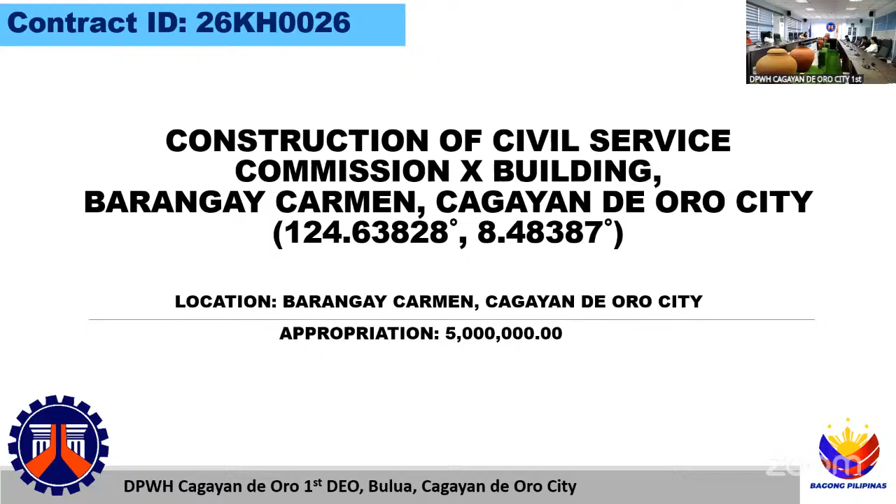Good afternoon. I will be presenting to you the first project entitled Construction of Civil Service Commission 10 Building, Barangay Carmen, Cagayan de Oro, located at Barangay Carmen, Cagayan de Oro, with an appropriation of 5 million. For the ABC, 4,899,645 and 47 cents, with a calendar days of 180. Major category: PCAB PLC buildings, construction without piles, low-rise concrete frame. Similar major category: PCAB PHC buildings, construction without piles, high-rise concrete frame.

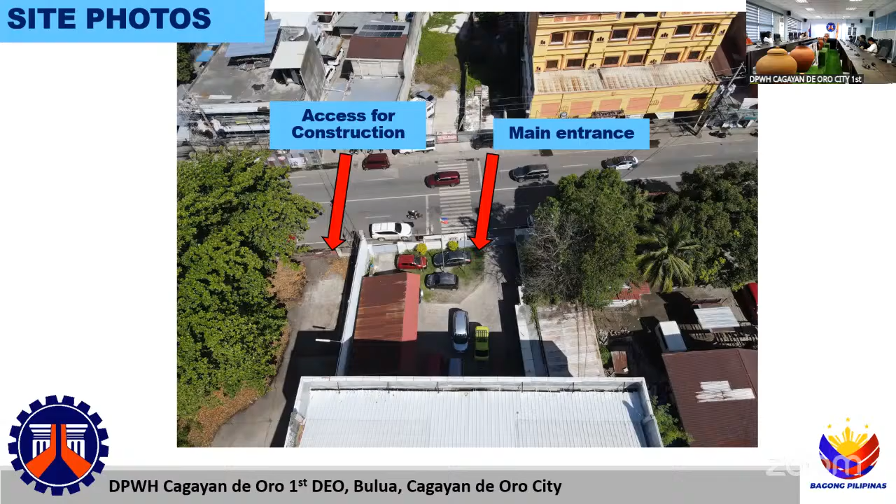The scope of work for this project is the construction of Civil Service Commission 10 building, CSC, as per plan. This is the site of the project, located at the Civil Service compound, showing the main entrance of the building and the proposed access for construction, which is the nearby property Bosco Sugar located at Carmen. Showing the main building of the Civil Service Commission.

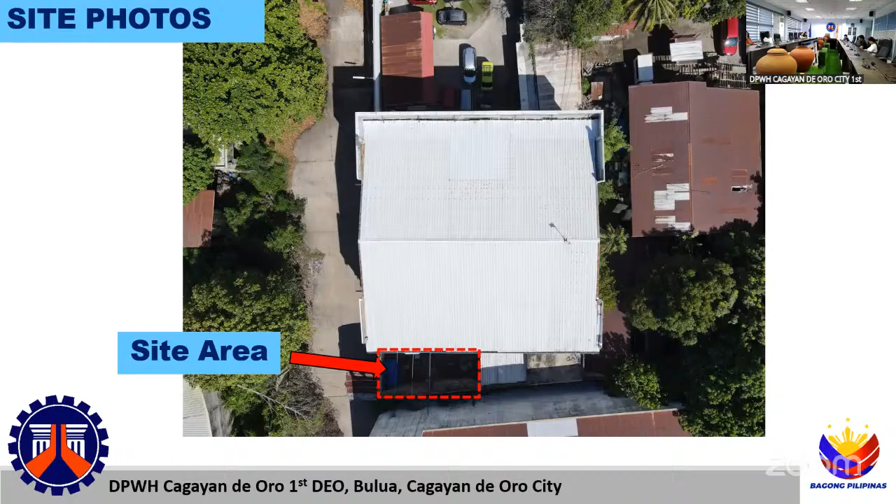This is the roof plan of the main building, and this is the proposed site area located at the rear portion of the building. This is the proposed perspective of the project, the two-story building.

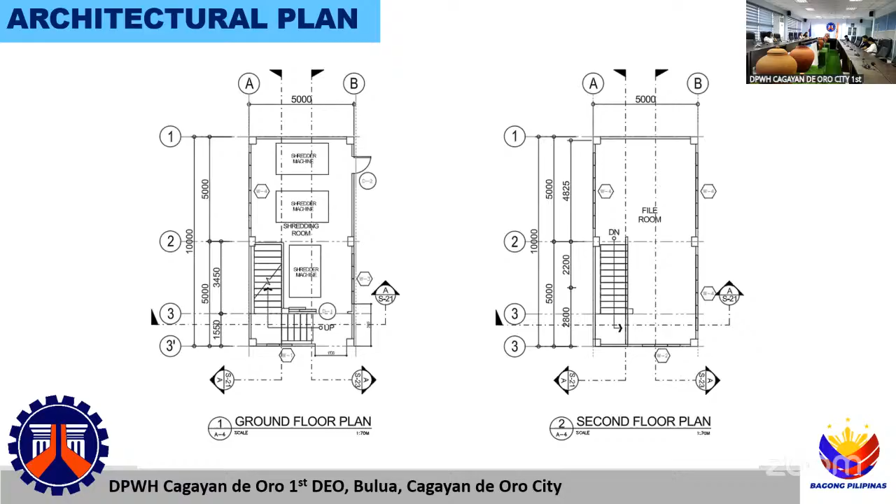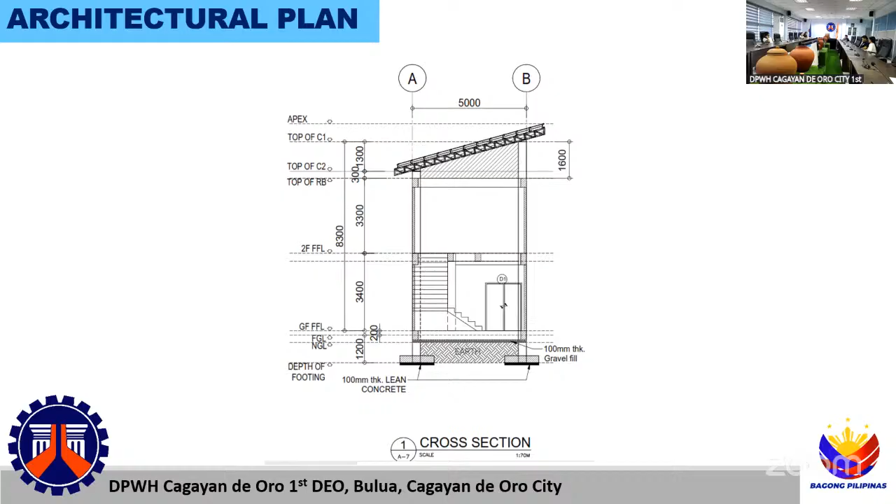Showing the cross section and our longitudinal section. So these are our schedule of doors and windows.

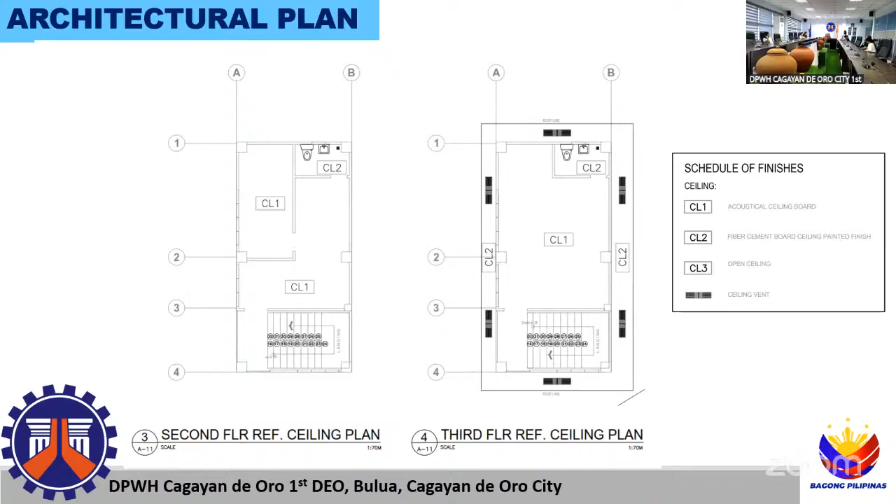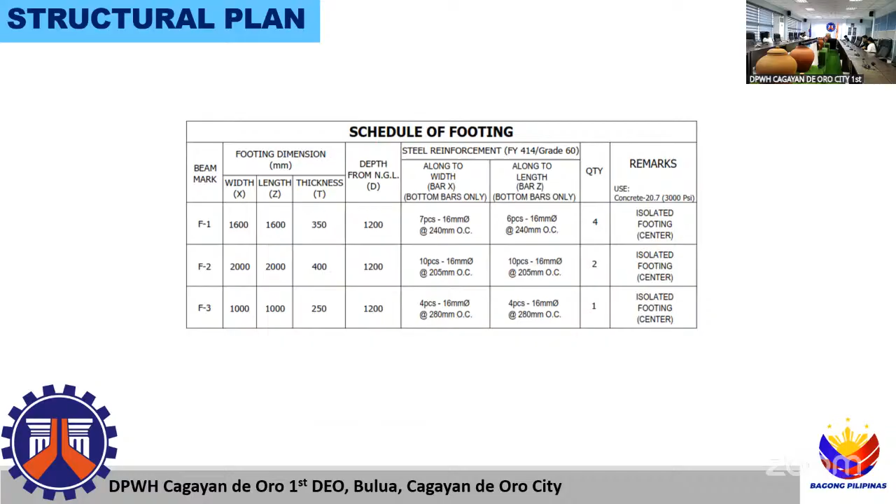For our footings and columns, for our scheduled footings, column details, our beam details.

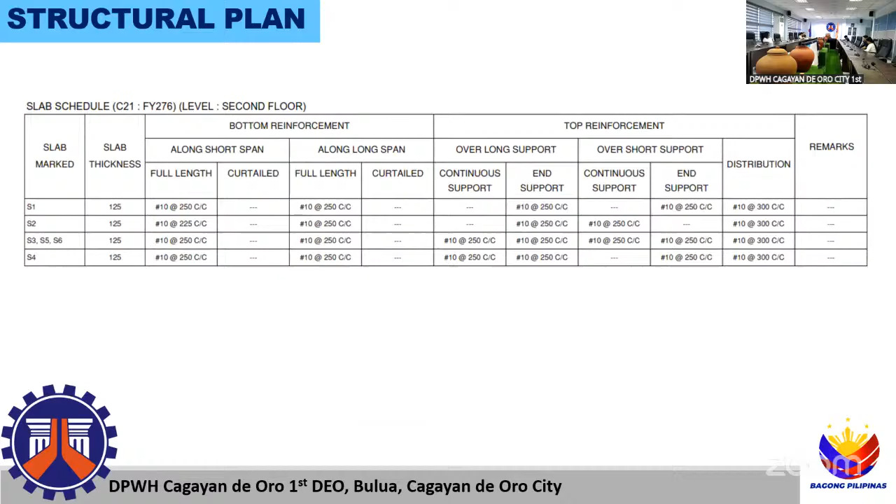Schedule of beams, for our slab detail, slab sections.

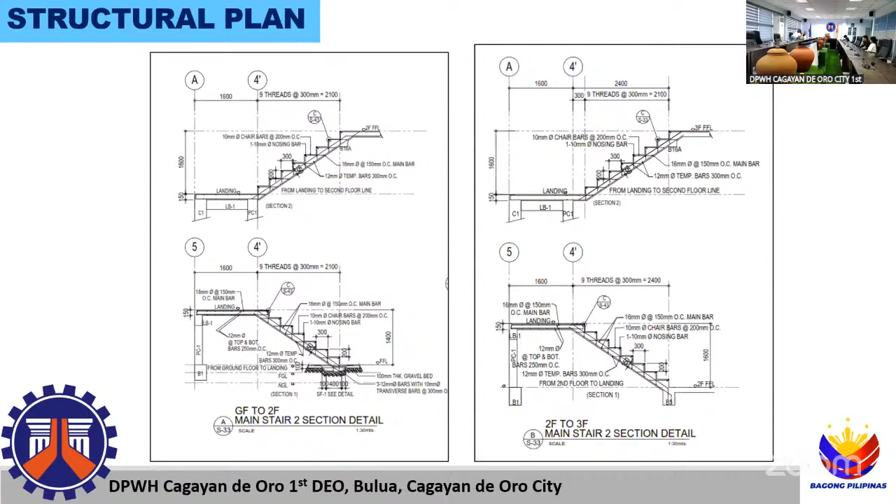Our longitudinal section and cross sections, for our framing and truss details, for the connection members, their details.

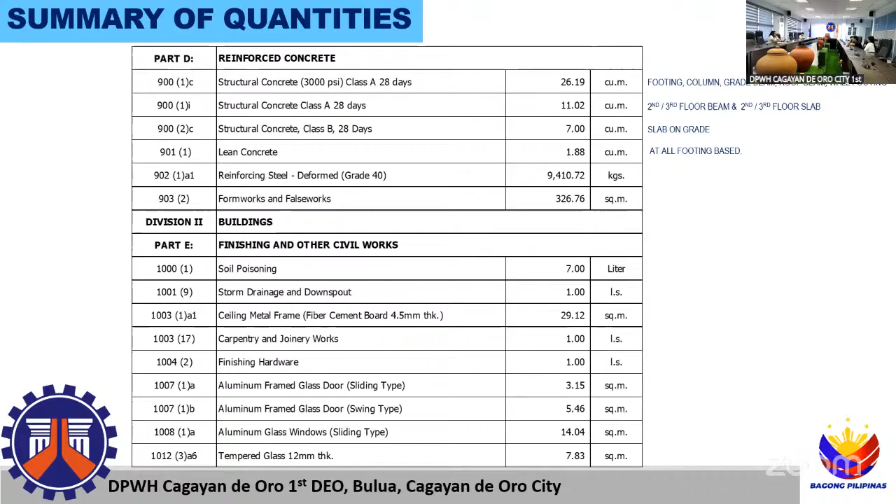Next, fabricated metal roofing accessory, gauge 26, for flashings, 46.36 linear meter, pre-painted metal sheets above 0.427 mm, rib type long span, 95.70 square meters, and glaze tile, 83.10 square meters.

Cement plaster finish, 443.56 square meters. Acoustical ceiling panel, 96.04 square meters.

Painting works, masonry and concrete, 337 square meters. Painting works for wood, 29.31 square meters. Painting works for steel, 8.32 square meters. Reflective insulation, 76.56 square meters.

CHB non-load bearing, including reinforcing steel, 100 mm, 132.28 square meters. Metal structure accessories, bolts and rods, 24 each. Metal structure accessories, turnbuckle, 16 each. Metal structure accessories, sag rods, 12.43 kilograms.

Metal structure accessories, cross bracing, 82.06 kilograms. Metal structure accessories for steel plates, 191.48 kilograms. Structural steel, 1 lump sum.

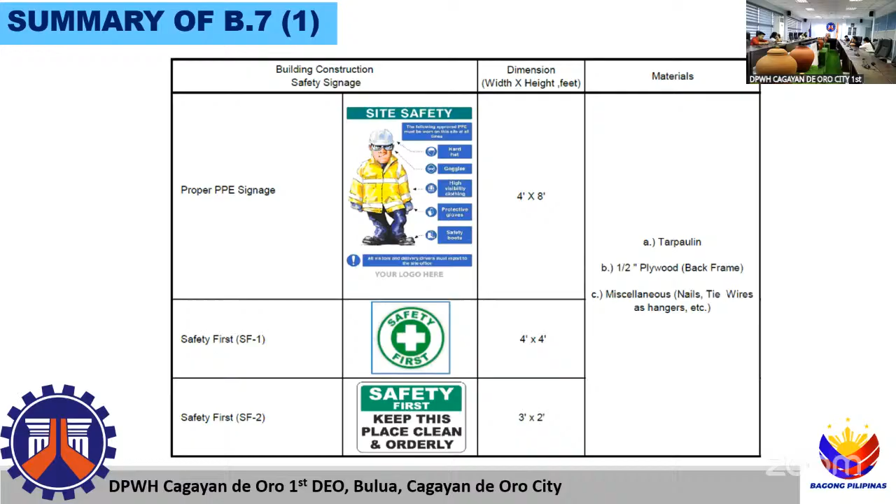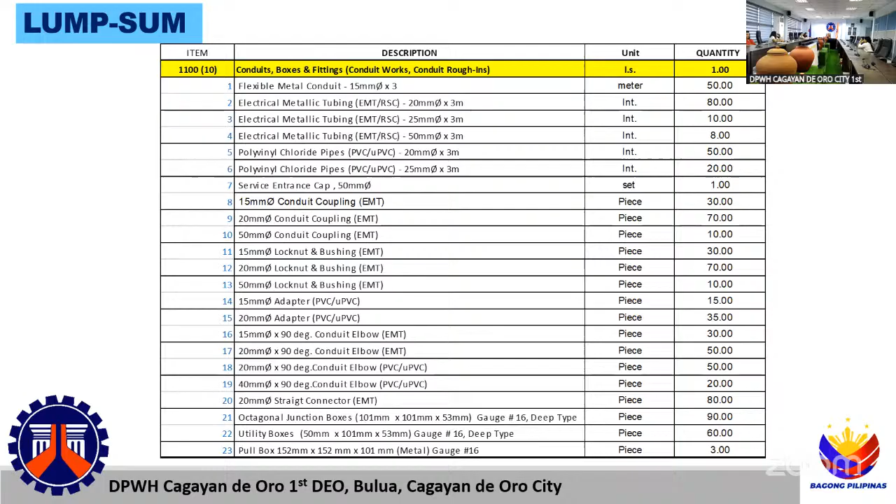So for the item, for the conduits, boxes and fittings, we have these items here, all the wirings, for conduits, boxes and fittings, and then for wires and wiring devices.

For panel boards, we have main distribution panel with 200 amperes, 250 amperes, single phase, 2P, 230 volts, 60 hertz, NEMA 1 flush mounted with 12 branch circuit breakers. Enclosure, 20 ampere 4 sets, 30 ampere 6 sets. This is 1 set. And then 250 AF main circuit breaker, single phase, 230 volts, 60 hertz in a NEMA 3R enclosure.

1 set also. For lighting fixtures and lamps, we have 30-watt ceiling mounted LED panel light, 6,500K, 3,030 LM, 1,200mm by W by 300mm, 230 volts, 60 hertz.

For 15 sets. For 5-watt self-contained emergency light pack, non-maintained 8 hours duration with 2 LED lamp, 230 volts, 60 hertz for 3 sets. Then 9-watt downlighting light fixtures with 12 watts LED bulb, 6 inches diameter recessed type for 8 sets.

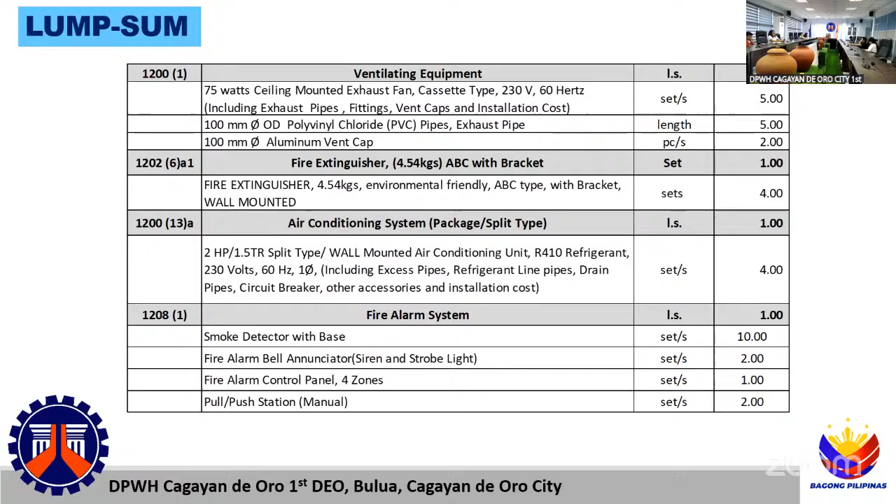For our CCTV system inclusion: CCTV camera dome type, 6 sets. CCTV camera PTZ type, 1 set. CCTV console, 1 set. Digital video recorder, 1 set. 1.5 kVA power supply, 1 set. 22-inch LCD LED monitor, 1 unit. And RG59 coaxial cable.

So for our minimum equipment requirement: backhoe, 1 unit lease; concrete vibrator, 2 units owned; dump truck, all models, 1 unit lease; bagger mixer, 1 unit owned; plate compactor, 1 unit owned; grinding machine with accessories, 1 unit owned; bar cutter, 1 unit owned; bar bender, 1 unit owned; welding machine, 1 unit owned; boom truck.

1 unit lease, material testing apparatus 1 set owned, minor tools 1 set owned, jackhammer 1 unit owned, concrete pump diesel driven 1 unit owned.

So, any questions from our viewers?

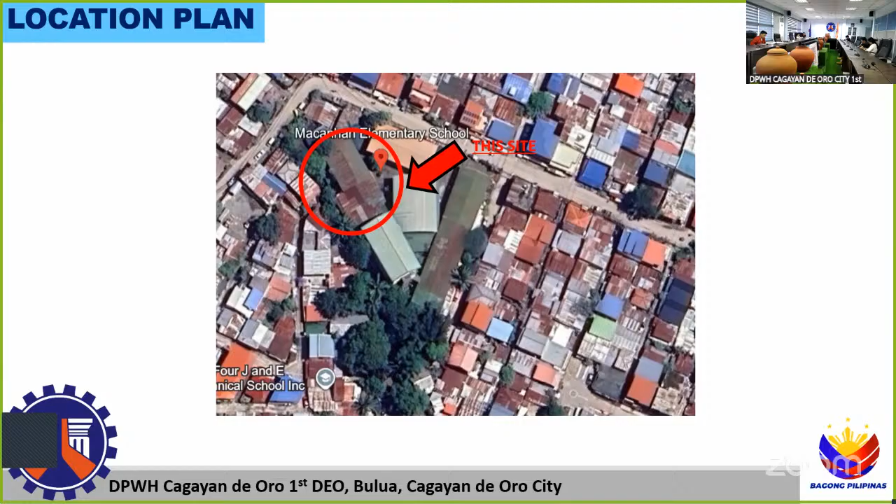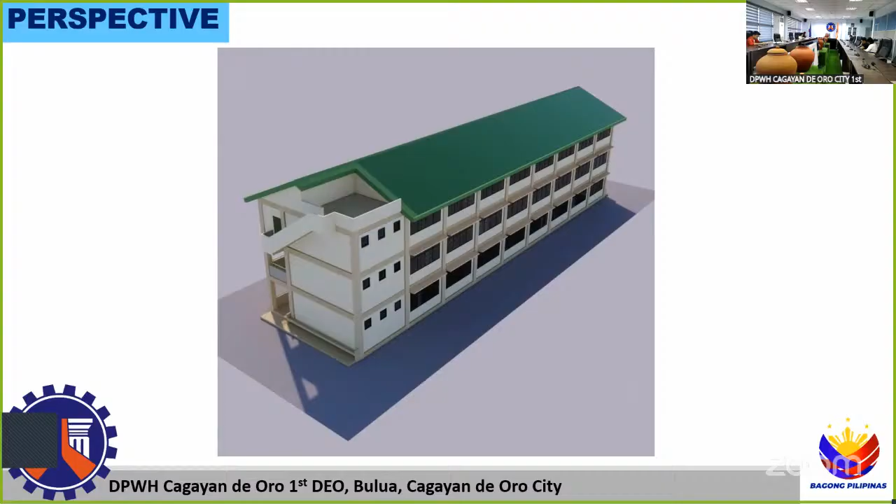This is the ground floor plan for the building. The first classroom will be assigned as a feeding room, with classrooms 3 and 4 combined as a library. For the second floor, 2 classrooms will be combined as an ICT room. And on the third floor, 2 classrooms will be combined as the science room.

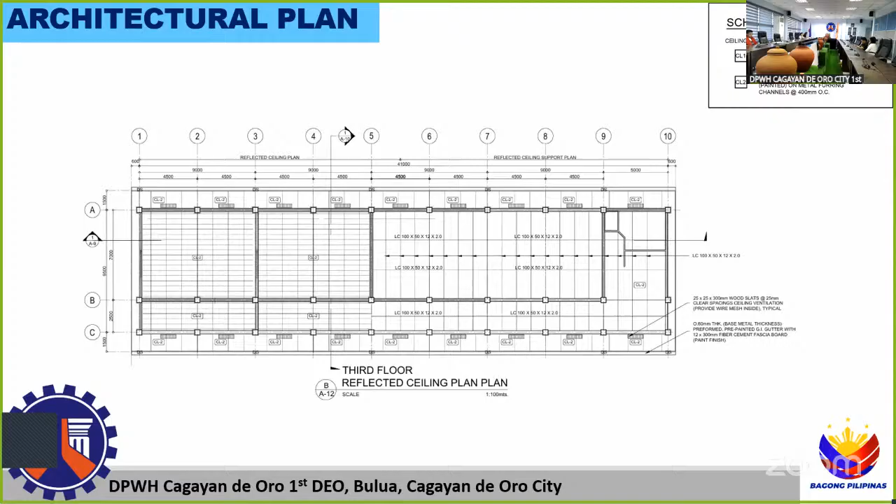Front elevation of the building, rear elevation, left and right side elevation, longitudinal section, cross section, ground floor reflected ceiling plan, second floor reflected ceiling plan, third floor reflected ceiling plan, the roof plan, schedule of doors and windows, detailed section of toilet for strict compliance as per BP 344, detailed elevation, detailed plan, and blow up details of handrails.

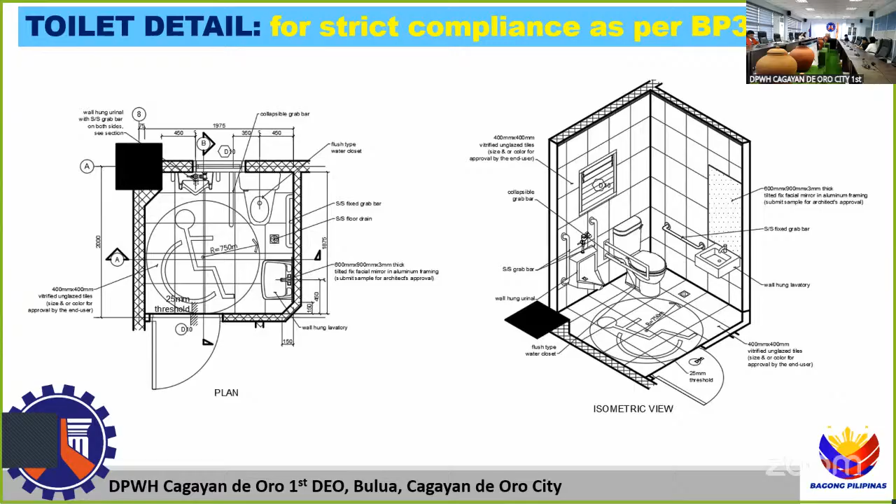Toilet detail. These are the details for the PWD toilet for strict compliance as per BP 344. Details of the ground floor.

Details for the male toilet at second and third floor and female toilet at the ground floor. Section 1 and 2 detail for male toilet, and section 1 and 2 details for female toilet.

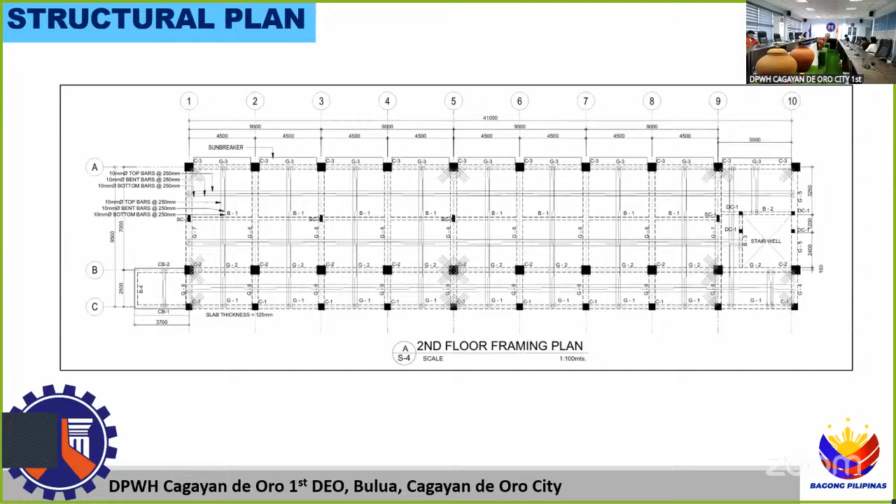These are the foundation plan, ground floor framing plan, second floor framing plan, third floor framing plan, roof framing plan at bottom chord level, and roof framing plan.

Detailed plans of combined footing and footings, footing tie beams and stub columns. Schedule of footings and footing tie beams. Elevation of column and columns, schedule of columns. Schedule of beams, schedule of secondary beams.

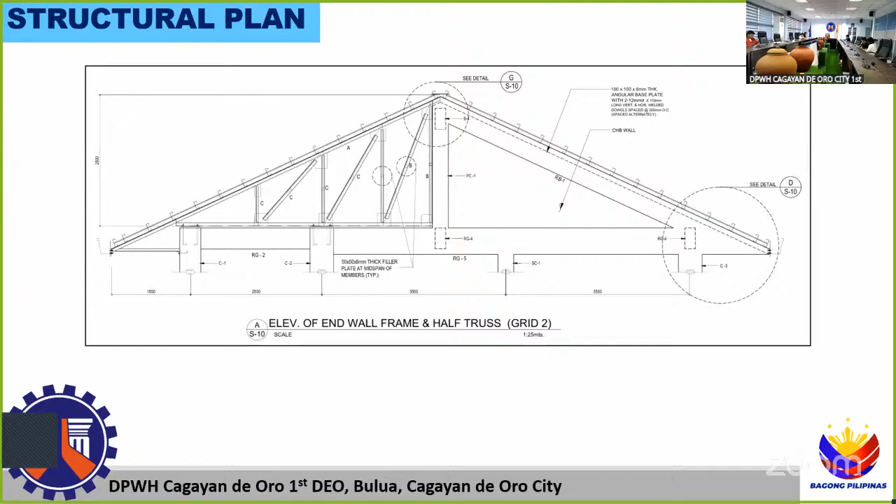Truss 1 elevation, elevation of end wall frame and half truss at grid 2. Schedule of truss members and welds. Concrete sunbreaker detail, and the stairs section detail. Blow up details for the stairs.

And the detail of the septic vault. Detail of the cistern tank. Longitudinal section of the cistern tank.

The ground floor plan, soil and wastewater line layout. Second floor, soil and wastewater line layout. Third floor plan, soil and wastewater line layout. And the roof drain layout.

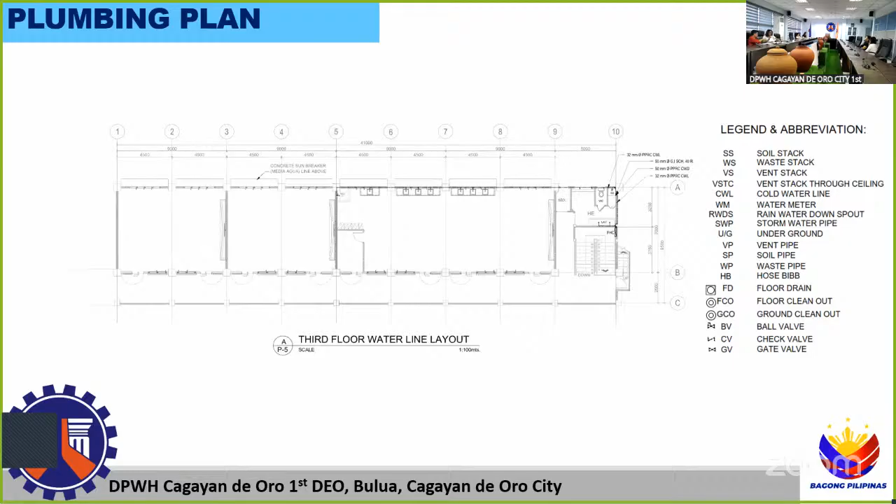Ground floor water line layout. Second floor water line layout. Third floor water line layout and the roof deck water line layout.

Summary of quantities. Facilities for the engineer. Construction of field office for the engineer, 1 lump sum. Permits and clearances, 1 lump sum. Project billboard and signboard, 2 each. Occupational safety and health program, 1 lump sum. Mobilization and demobilization, 1 lump sum.

For the earthworks: removal of structure and obstruction, 1 lump sum. Structure excavation, common soil, 1,338.53 cubic meters. Individual removal of trees, 1 each. Embankment from roadway structure excavation, common soil, 1,703.43 cubic meters. Embankment from borrow, common soil, 364.9 cubic meters. Gravel fill, 123.81 cubic meters.

For the reinforced concrete: structural concrete, 3,000 PSI, class A, 28 days, 525.09 cubic meters. Structural concrete class B, 28 days, 81.99 cubic meters. Reinforcing steel, D4, grade 40, 118,250.40 kilograms. Formworks and false works, 2,966.83 square meters. For the finishing and other civil works: soil poisoning, 34 liters.

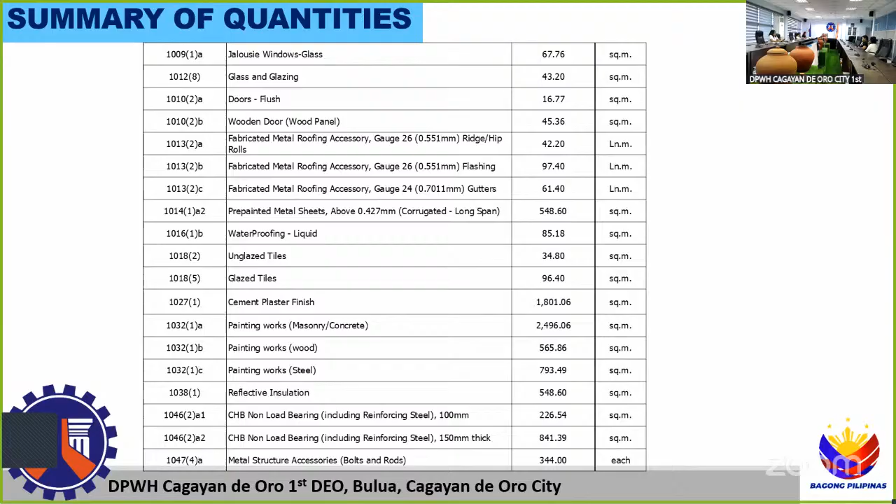Metal structure accessories: bolts and rods, 344 each. Turnbuckle, 36 each. Sag rods, 245.09 kilograms. Cross bracing, 397.66 kilograms. Steel plates, 1,476.63 kilograms. Structural steel, 1 lump sum.

Structural steel trusses, 3,864.64 kilograms. Structural steel purlins, 3,864 kilograms. Welding, 1 lump sum.

For electrical: conduits, boxes and fittings, 1 lump sum. Wires and wiring devices, 1 lump sum. Panel board with main and branch breakers, 1 lump sum. Pole mounted transformer with complete accessories, single or three-phase, pole type or platform, 1 lump sum. Generator, single or three-phase, 1 lump sum. Lighting fixtures, 1 lump sum. CCTV system, 1 lump sum.

For the mechanical ventilating equipment, 1 lump sum. Air conditioning system, 1 lump sum. Water pumping system, 1 lump sum. Automatic fire sprinkler system, 1 lump sum. Fire hose cabinet assembly, 3 sets. Fire extinguisher, 4.54 kilograms with bracket, 12 sets. Fire department connections for wet and dry type system, 1 set. And fire alarm system, 1 lump sum.

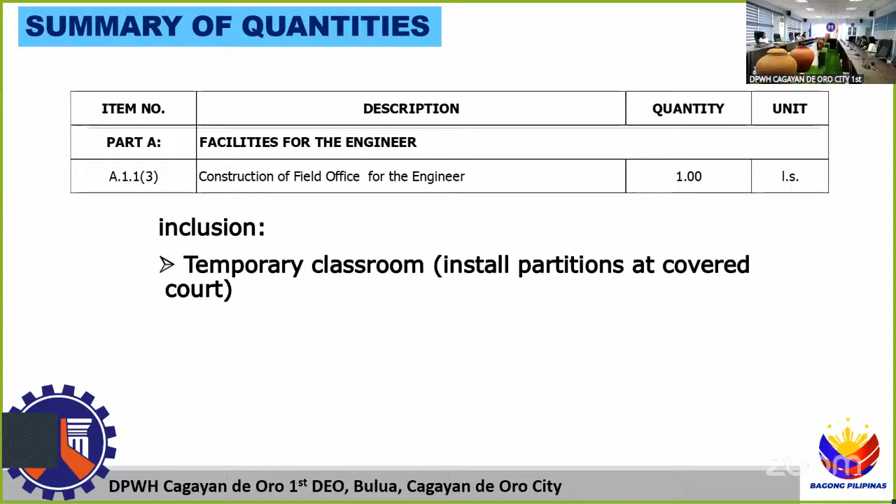For the summary of lump sum: facilities for the engineer, inclusion, temporary classroom, installed partitions at covered court. Permits and clearances, inclusion: building permit, all professionals, and the Bureau of Fire.

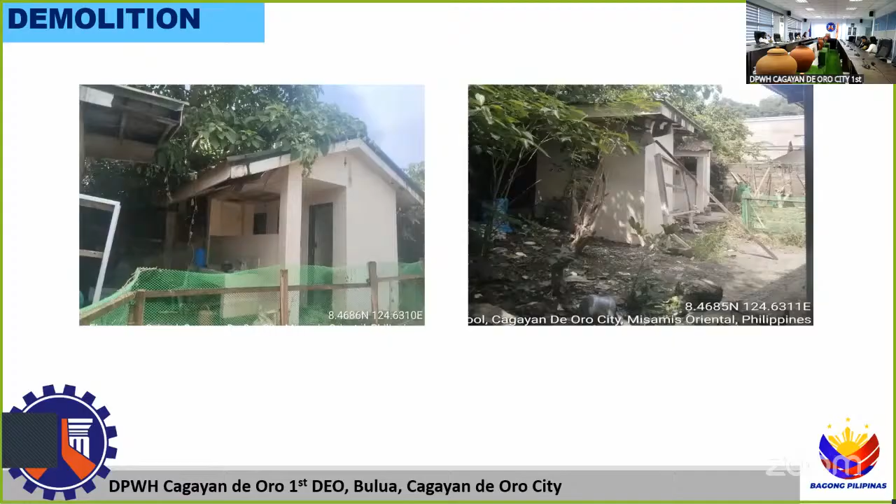For the removal of structures, inclusion is the demolition of the existing structure and the adjacent structure, the HE building, and the existing 1 classroom at the left side of the 2-story existing building, and the existing toilets at the rear side of the building.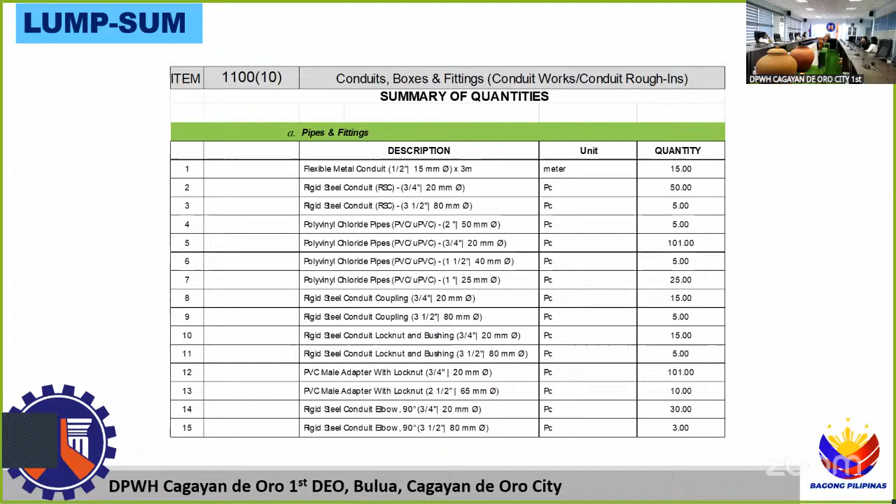For the carpentry and joinery works. For the conduits, boxes and fittings. For the wires and wiring devices. For the panel board with main and branch breakers. For the pole mounted transformer with complete accessories. For the lighting fixtures and the CCTV system.

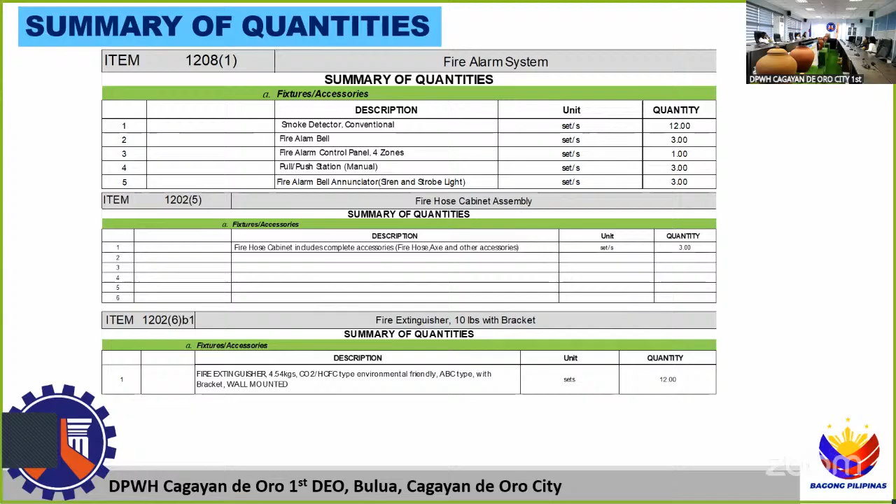For the ventilating equipment, for the air conditioning system: 4 HP wall mounted air conditioning unit, 6 sets. Water pumping system. Fire alarm system, fire hose cabinet assembly, fire extinguisher, 12 sets.

Minimum equipment requirement: backhoe, 1 unit, leased. Concrete vibrator, 2 units, owned. Dump truck, all models, 1 unit, owned. 1 bagger mixer, 1 unit, owned. Plate compactor, 1 unit, owned. Grinding machine, 1 unit, owned. Bar cutter, 1 unit, owned. Bar bender, 1 unit, owned. Welding machine, 1 unit, owned. Truck mounted crane, standard lattice boom, all models, 1 unit, leased. Pumpcrete, 1 unit, leased. Material testing apparatus as per DEO 11 series of 2017, 1 unit, owned. Minor tools, 1 unit.

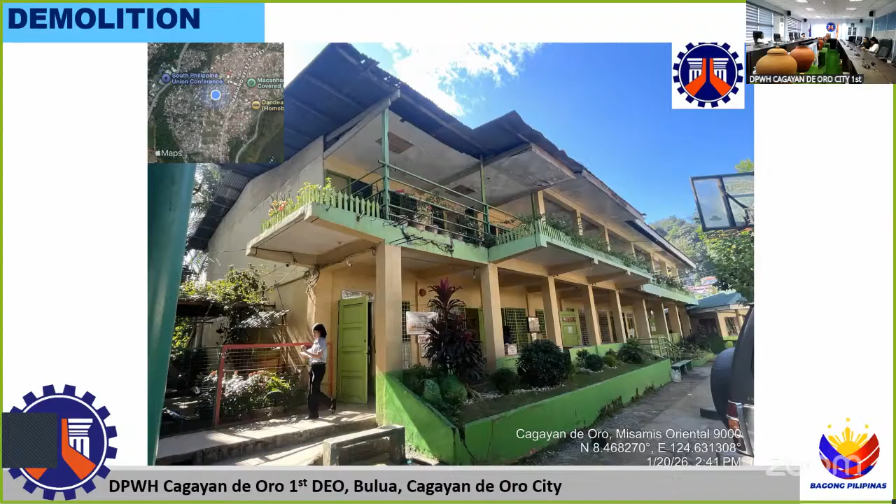26KH0048, network development off-carriageway improvement, primary roads, Butuan City, Cagayan de Oro City, Butuan City, Cagayan de Oro City, Iligan City Road, S01247, kilometer 1441 plus minus 842 to kilometer 1439 plus 184, Cagayan de Oro City. The details of this project will be discussed by Engineer Aldrin Farfel.

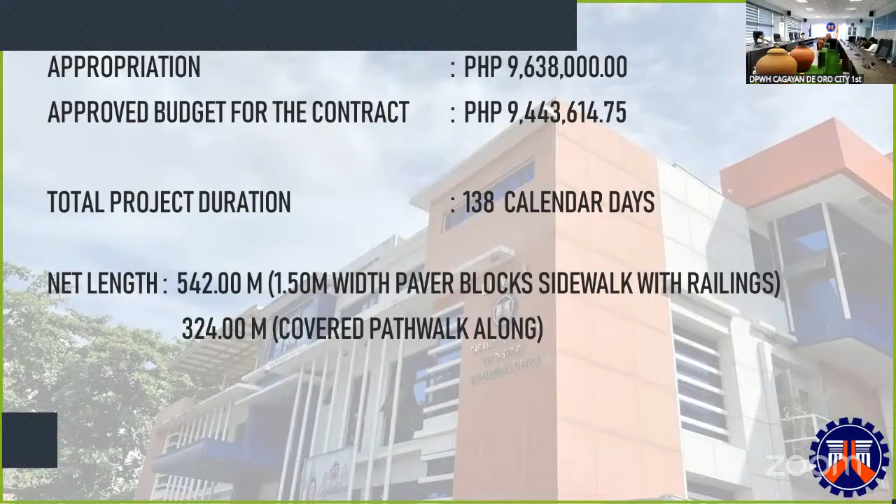For the location of our project: the beginning of our sidewalk is at kilometer 1441 plus minus 424, near the front of the Boulevard Terminal intersection. Then the end of our sidewalk is at kilometer 1440 plus 740, located near the Quick Drive. For the start of the sidewalk, this is the location.

So we'll follow along the existing sidewalk. We will fully develop it. And also there will be gaps due to commercial areas. We will provide a drop curb for these areas.

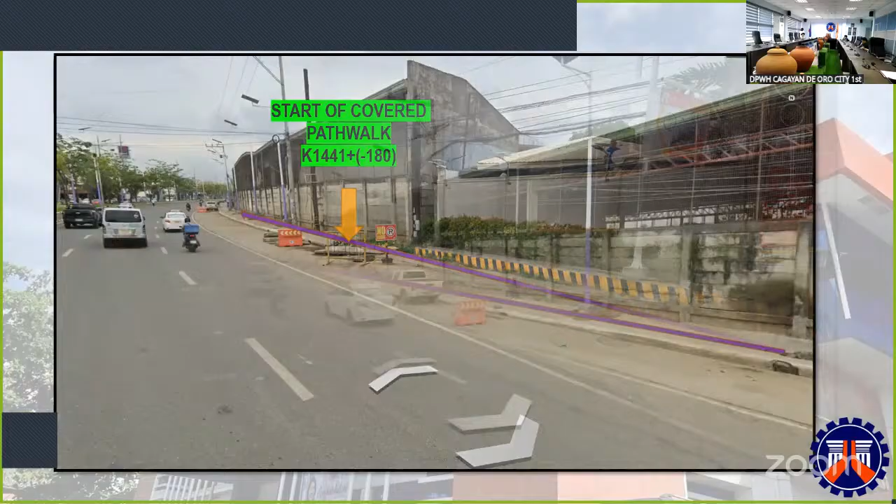And also, beginning near Cagayan de Oro, we will start the covered pathwalk at kilometer 1441 plus minus 180, alongside Cagayan de Oro. So this is an example of what it will look like.

End of the covered pathwalk at K1440+840. The end of our sidewalk will be near the Quick Drive, or K1440 plus 740.

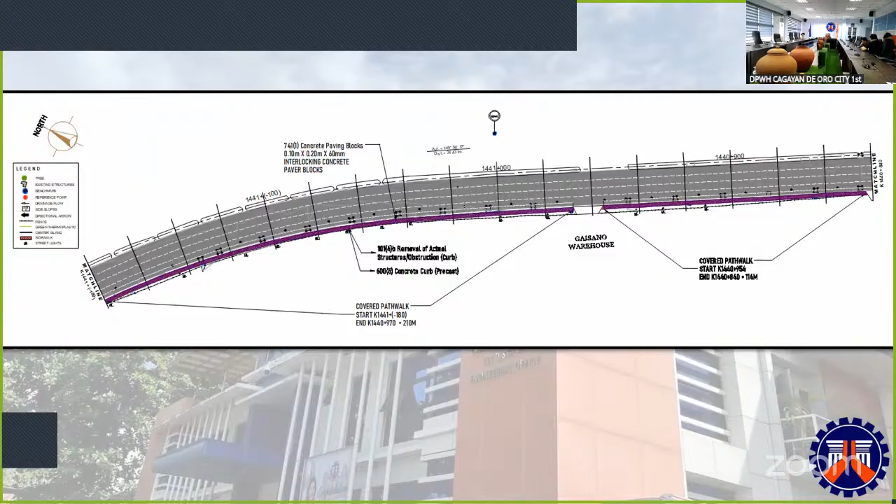So we can see here we have concrete paving blocks and also removal of structures, obstruction curb, and also the concrete curb precast. Our project will end at K1440+740.

For the typical details of our project, we have the typical road section with sidewalk, and also the typical section, roadway section with sidewalk and covered pathwalk. We have the same, also put the station limits here.

For the details, for section 1, we have a proposed sidewalk with railings, 1.5 meter width, and also metal railing, grade 36 steel for the metal railings. On the other side, the proposed sidewalk with railings and covered pathwalk, included shown here the items needed.

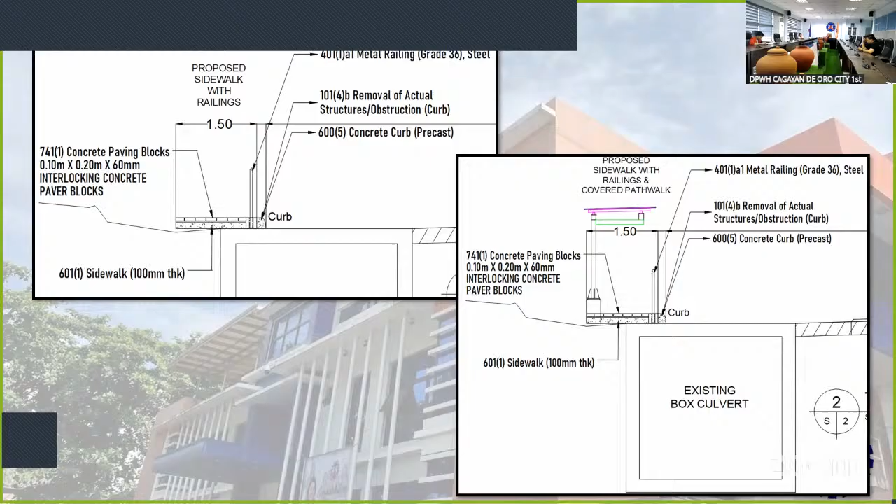We have a sidewalk 100 mm thick, and we will also put the concrete paving block above it. The details for our sidewalk and also the steel cover plate of the sidewalk.

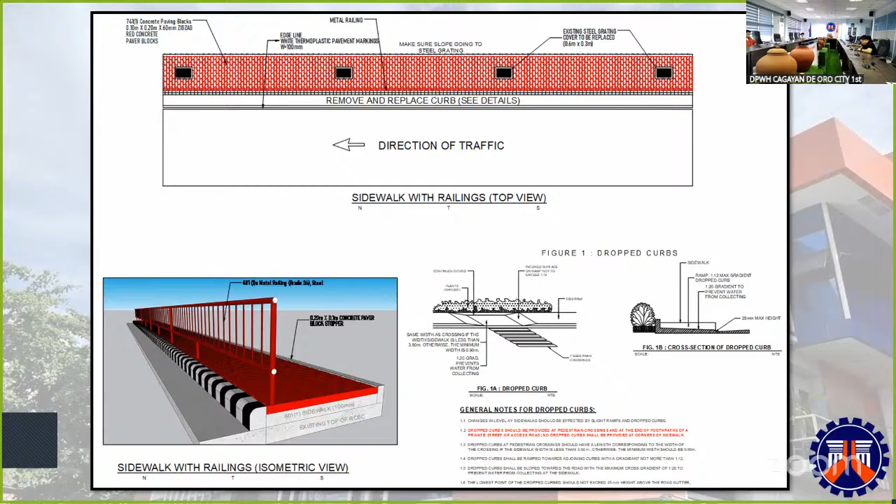So the sidewalk with railings and covered catwalk, isometric view. Location in front of the Sun warehouse.

For the summary of quantities, this shown here as the revised bill of quantities for this project, which will be posted in the bid bulletin.

So for our items: Bid item 5, project billboard signboard, for each. The occupational safety and health program, 1 lump sum. Bid item 8(2), traffic management, 1 lump sum. Bid item 9, mobilization/demobilization, 1 lump sum.

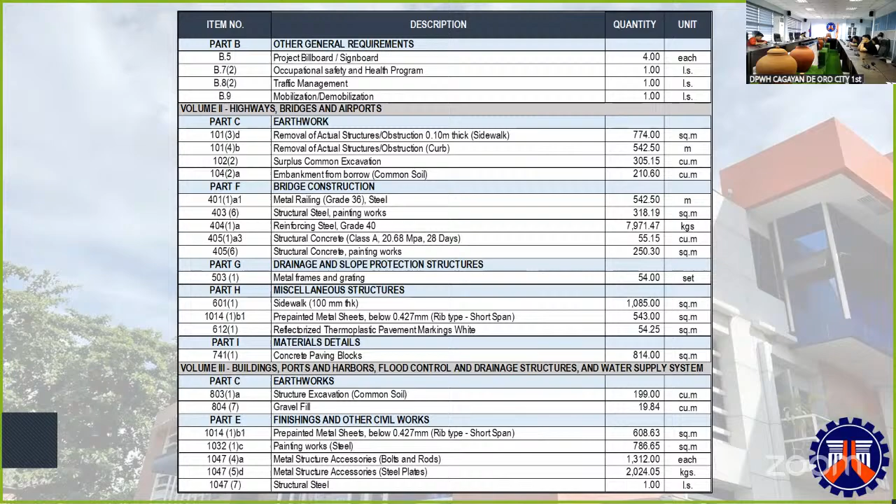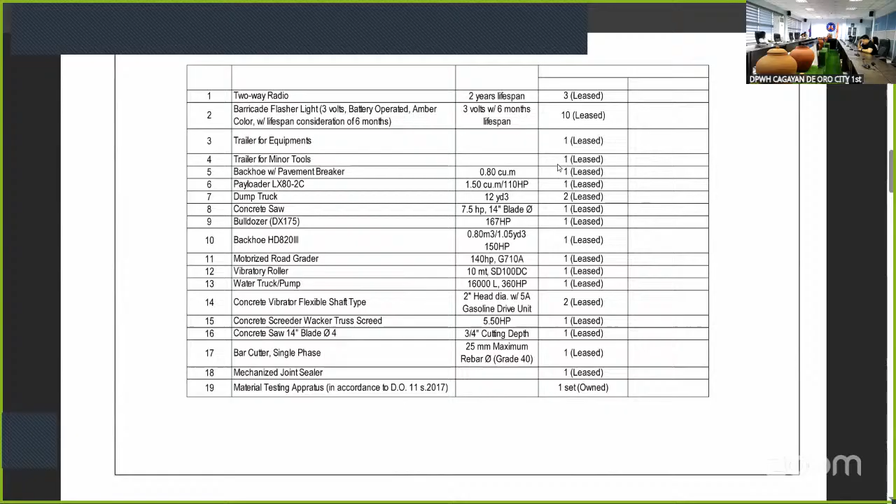For the minimum equipment required: two-way radio, 3 lease; barricade flasher light, 10 lease; trailer for equipment, 1 lease; trailer for minor tools, 1 lease; backhoe with pavement breaker, 1 lease; payloader, 1 lease; dump truck, 2 lease; concrete saw, 1 lease; bulldozer, 1 lease; backhoe, 1 lease; motorized road grader, 1 lease; vibratory roller, 1 lease; water truck/pump, 1 lease; vibrator, 2 lease; screeder, 1 lease; concrete saw, 1 lease; bar cutter, 1 lease; mechanized joint sealer, 1 lease; material testing apparatus in accordance with D.O. 11 series 2017, 1 set; 1 bagger mixer, 1 lease; and backhoe wheel mounted, 1 lease.

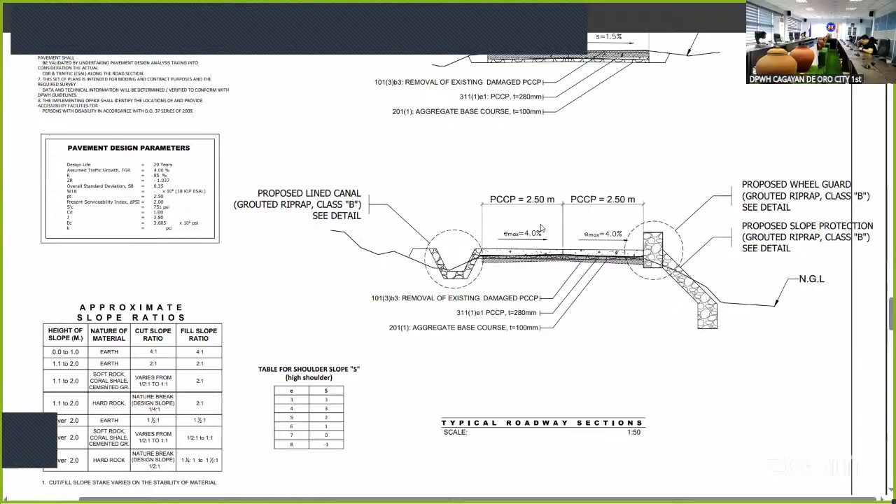Here are the typical roadway sections. We have 2.5 meters for each lane of PCCP, 280 mm for the thickness of PCCP, and 100 mm for the aggregate base course thickness, as shown here with the proposed lined canal, proposed wheel guard, and slope protection. That's for the typical roadway sections. Proceeding to the typical slope protection structures, cross drain, and the head wall.

And for the reblocking, of course. So that's all for rehabilitation of road at Barangay Pagalungan.

Any questions? Thank you, Engineer Carmen. So is there any questions or clarifications regarding the details of this project? There is none. How about for our online viewers? There is none.

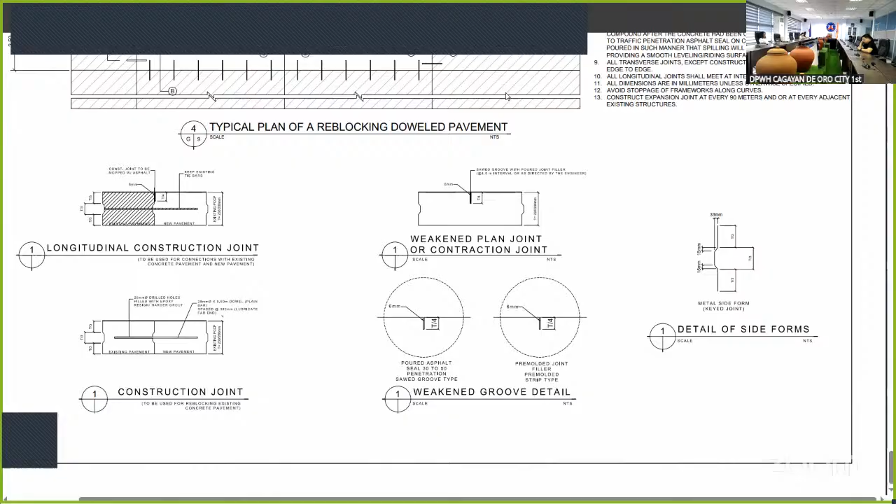So now let's proceed to the 5th project. 26KH0050, asset preservation, rehabilitation, reconstruction, upgrading of damaged paved roads, secondary roads, CDO-Airport-Bukidnon Road, kilometer 1459 plus 910 to kilometer 1462 plus 000, Cagayan de Oro City. So the details of this project will be discussed by Engineer Ares Calizo.

You can now proceed, Engineer Ares. Good afternoon, everyone. Asset preservation, rehabilitation, reconstruction, upgrading of damaged paved road, secondary road, CDO-Airport-Bukidnon Road, Station K1459 plus 910 to Station K1462. This is located in Barangay Dansolihon, Cagayan de Oro City, with a net length of 2,090 meters, with an appropriation of 36,998,543.69 and project duration of 315 calendar days.

So the scope of work is rehabilitation of existing paved road to PCCP paved road with thickness of 0.28 meters thick and 3.35 meters on both sides, and installation of solar LED roadway lightings 9 meters high.

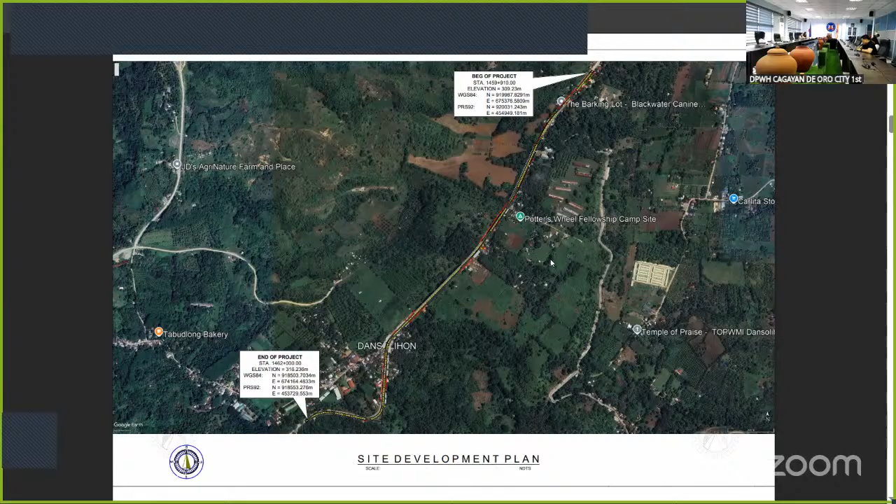So the general drawing, it is located in Barangay Dansolihon. This is the vicinity map. And for the site development plan, this is the whole stretch, accompanied with each northing and easting of the project.

So for the plan and profile, the scope of work is also put here, for every scope of work of every station limit. So not the whole stretch of the project is to be rehabilitated since there are stations with new PCCP. So the scope of work is here to guide the project works.

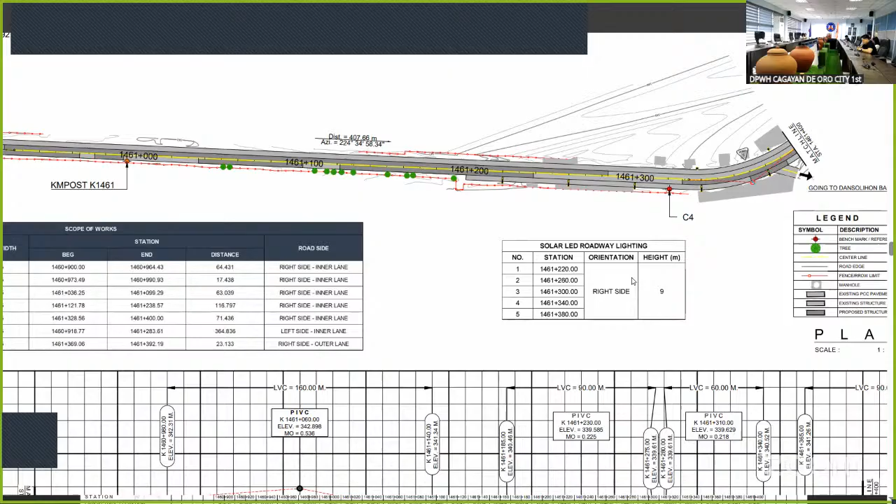So there's also stationing of the solar LED roadway lightings. So these are the plan and profile.

So these are the details of the reblocking, the detail for reblocking, PCCP details, and geometric design standard drawings.

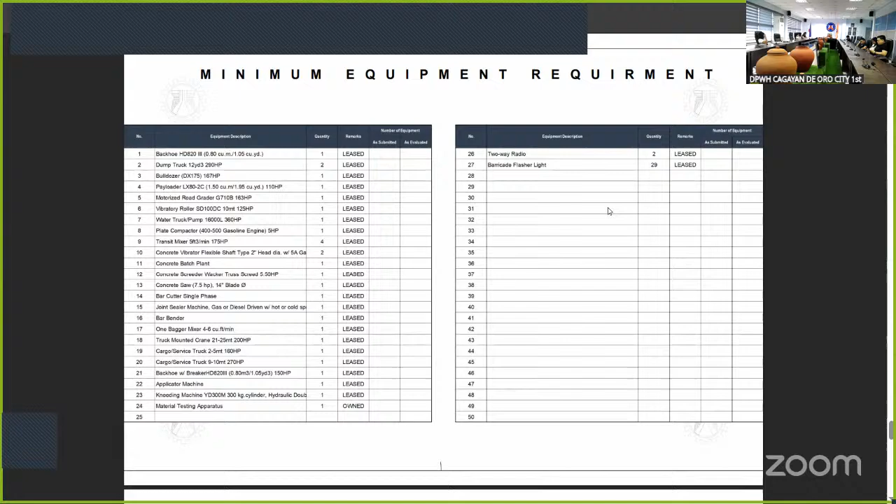So for the inclusions of our pay items, we have item 8.1.18, provision of field office for the engineer rental basis. The inclusion of this pay item is a 20-footer container van with ACU, furnished and maintained, or if not available on site, its equivalent. Also there's an inclusion of 3 tables and 3 chairs.

So for item B.3, permits and clearances, the inclusion of this item is the NCIP permits and clearances as per memo order number R10-FBV-00395, series of 2025. And also for the specifications of our single arm solar LED roadway lighting, 9 meters pole, 125 watts.

Also the attachments of our soil test report. And as for the road right of way, it will be submitted to the bid bulletin since it is on process. So that's all for this project.

Thank you. Any questions? Thank you, Engineer Harris. So is there any questions or clarifications? There is none. How about our online viewers? There is none. So there is no questions and clarifications for this project.

So let's now proceed for our sixth project. 26KH 0051. Asset preservation, rehabilitation, reconstruction, upgrading of damaged paved roads, tertiary roads, Lumbia, Iguiaban, Bypass Road, S0061 and GH 3095 to GH 3805, Cagayan de Oro. The details of these projects will be discussed by Engineer Aris Calis.

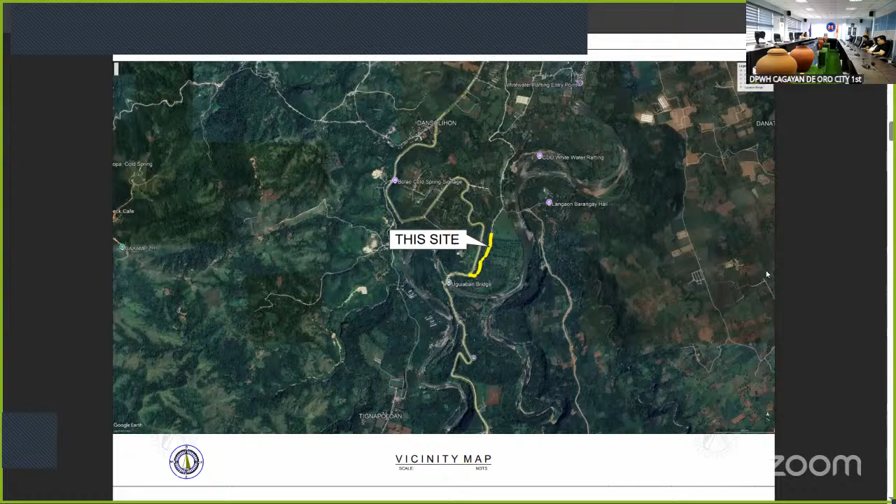So for the general drawing, this is located in Barangay Dansolihon. This is the bypass road. So this is the site development plan with its coordinates. So these are the geotag images.

Also, after the asphalt section, we will be having the rehabilitation of road. And this is the end section of the project. And this is the disposal site plan.

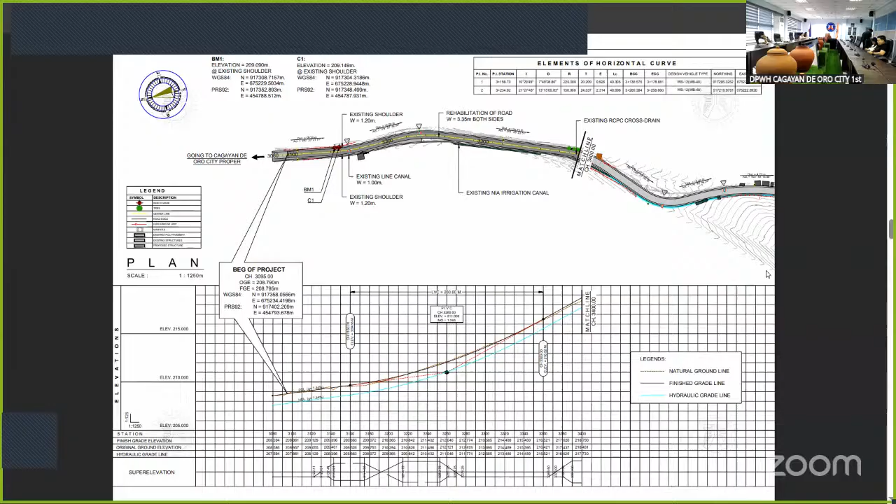So for the plan and profile, this is the plan and profile with its labeled scope of works. We will be rehabilitating the existing number of lanes, which is just 2, so we will be rehabilitating the 2 lanes. And also there's construction of line canal.

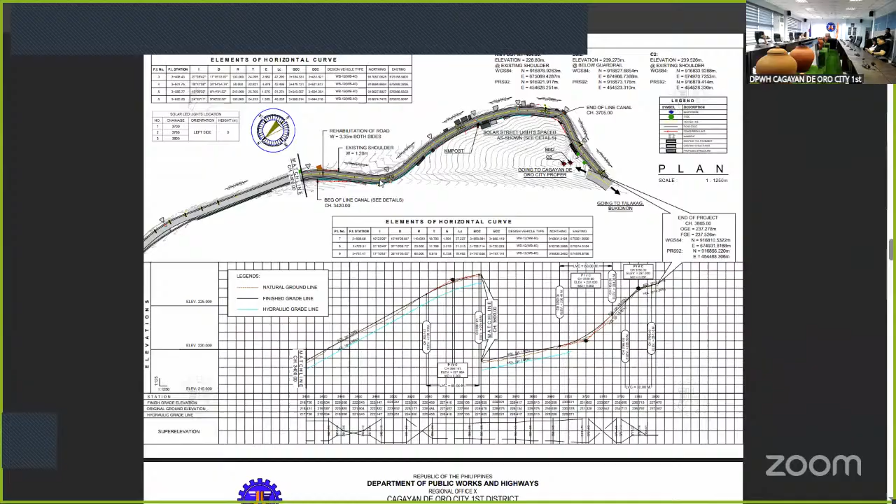As you can see here, there's a station limit. And also the solar LED roadway lightings stationing. So this is the straight line diagram.

For typical drawings, this is the typical drawings. We have here 2-lane, 3.35 meters width of existing road to be rehabbed. Also there's an existing shoulder and the construction of solar roadway lightings. And also these details for construction of line canal along with the station limits.

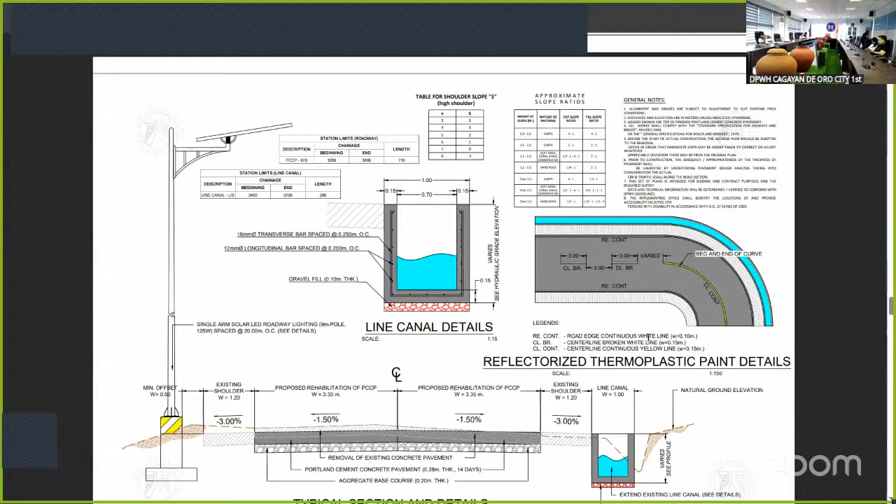And also this project has an accompanied reflectorized thermoplastic pavement markings all length, and the details for the reblocking. So for the PCCP details and the geometric design standard drawings.

For our summary of quantities, we have a provision of field office for the engineer on rental basis, 7.77 months. Permits and clearances, 1 lump sum. Project billboard signboard, 4 each. Occupational safety and health program, 1 lump sum. Traffic management, 5.8 months, and mobilization, demobilization, 1 lump sum.

For removal of actual structure obstruction, 0.23 meters thick, PCCP and reinforced, 4,757 square meters. Surplus common excavation is 1,669.44 cubic meters. Structure excavation common soil, 324.66 cubic meters, and gravel fill of 29.93 cubic meters. Aggregate base course, 951.4 cubic meters.

Portland cement concrete pavement and reinforced, 0.28 meters thick, 14 days, 4,757 square meters. For the reinforcing steel, grade 40, 9,698.84 kilograms. Structural concrete, 20.68 megapascal, class A, 14 days, 127.76 cubic meters. Structural concrete painting works, 2.4 square meters.

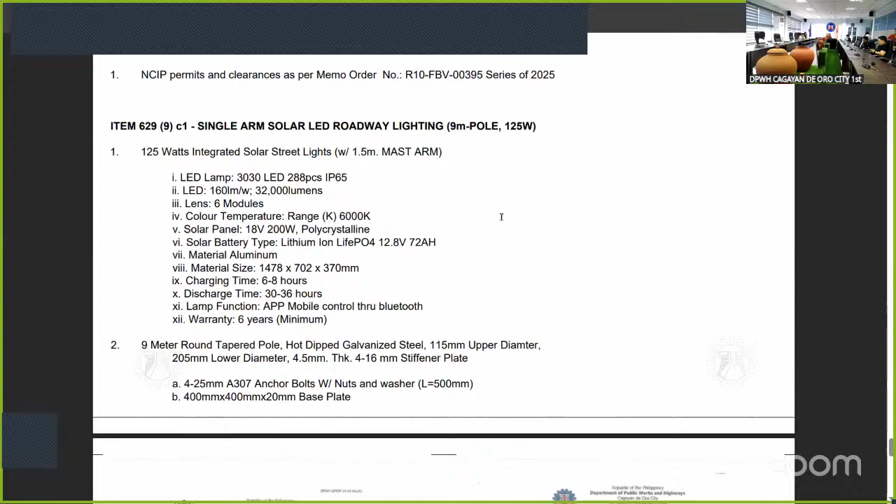And again, the soil test reports of this project, and also for the road right of way, will be submitted at the bid bulletin since it's still in process. So that's all for this project. Thank you.

Thank you, Engineer Alice. So is there any questions or clarifications? There's none. How about our online viewers? So there's none, no questions on the details of this project.

So now let's proceed to our last project for this afternoon. 26 KH 0052, asset preservation, rehabilitation, reconstruction of roads with slips, slope collapse, and landslide, secondary road, CDO-Airport-Bukidnon, kilometer 1453 plus 000 to kilometer 1453 plus 055, and kilometer 1453 plus 714 to kilometer 1453 plus 782, Cagayan de Oro City. The details of this project will be discussed by Engineer Andre Martin.

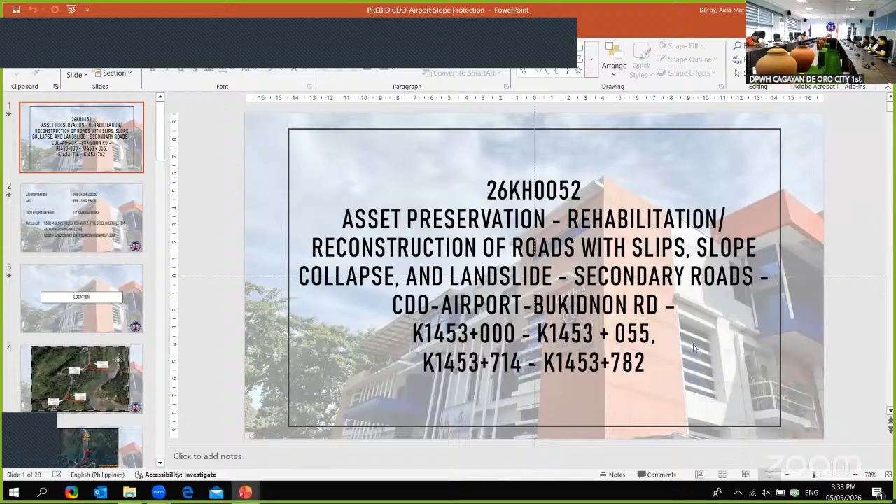Please proceed. Good afternoon, everyone. I will present the 26 KH 0052, the asset preservation, rehabilitation, reconstruction of roads with slips, slope collapse, and landslides, secondary roads, CDO-Airport-Bukidnon Road, kilometer 1453 plus 000 to kilometer 1453 plus 055, and kilometer 1453 plus 714 to kilometer 1453 plus 782. So we have an appropriation of 24,095,000.

With approved budget for contract of 23,612,986.81 pesos, and a total project duration of 212 calendar days, with a net length of 55 meters slope protection, with C-type steel sheet pile 8 meters, and also a retaining wall on section 2, 5-meter height, 68 meters retaining wall, and an 83-meter extension of the existing retaining walls with a height of 1.5 meters.

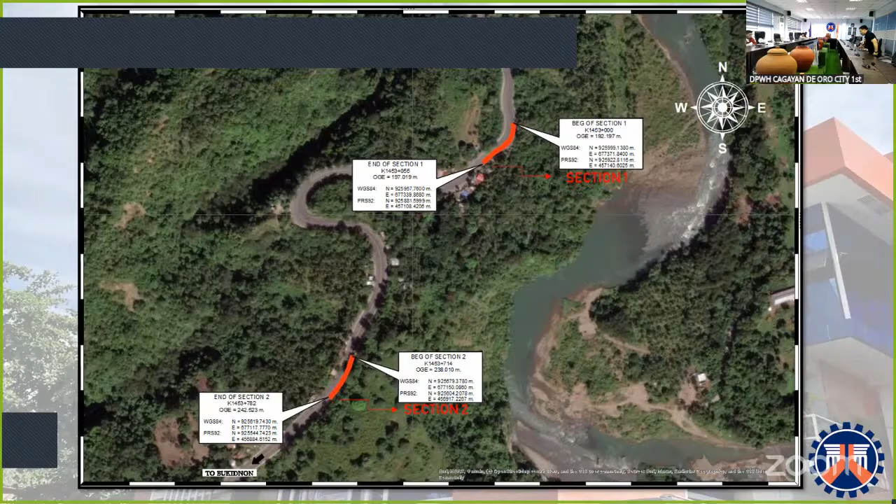For the location of our project, this is the location. So we have section 1 and section 2. For section 1, it is located near the 1453 kilometer post.

The project is on the left side, on the slip side. So here is the assumed location for the access road for the slope protection. You can see in the slip area, we have the slope protection needed to be constructed near many trees, so this has been checked in our right of way, and also the possible number of trees included has been counted.

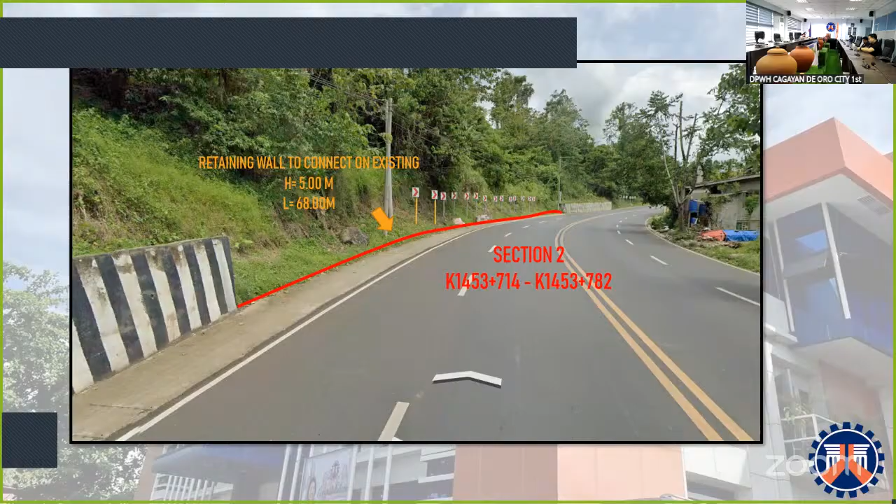So we proceed to section 2, kilometer 1453 plus 714 to kilometer 1453.782. The red line is the 5 meter retaining wall I will build, with a net length of 68 meters. We will also add additional height to the existing retaining walls to make it uniform. So here is the top view of our project, section 2.

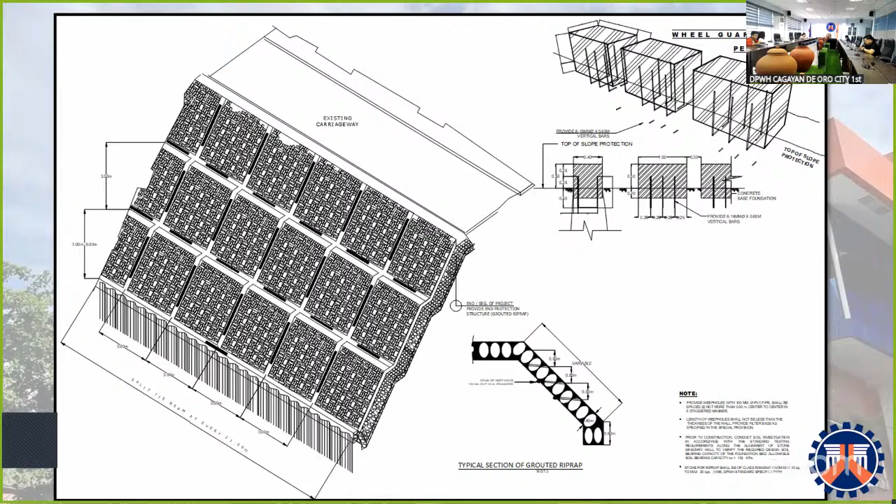With the isometric view, and also the typical section of a grouted riprap, and the wheel guard detailed perspective. The details for pedestal with footing detail, the hot rolled Z-type steel sheet pile with a net length profile of 8 meters. The transverse beam details, also the spring beam details, and the steel sheet pile top details on the bottom.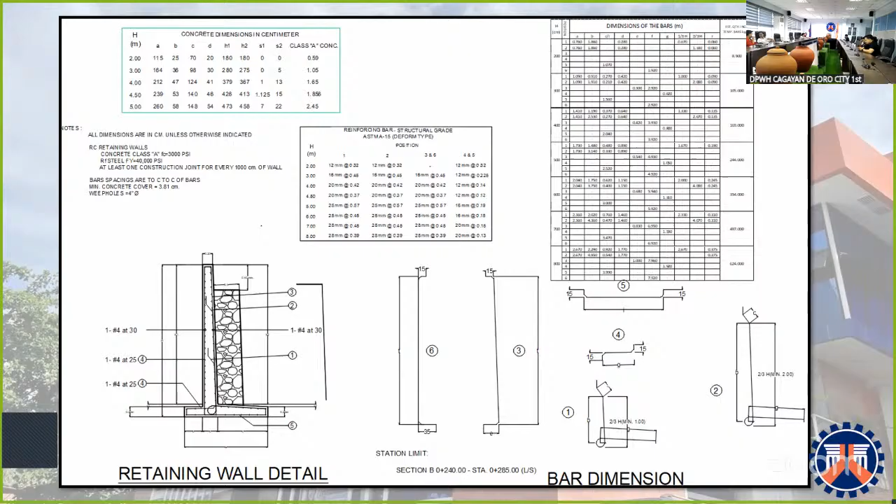The details for our retaining wall: we have the height of 5 meters, so we'll follow the 5-meter height concrete dimensions in centimeters, and also the bar dimensions. For the connection detail of the existing retaining wall, we have a 1.5 meter height additional retaining wall, and also the detail connection in between and the reinforcement needed.

For the minimum equipment requirements: trailer for equipment, 1 unit; crawler crane, 1 unit; vibro hammer, 1 unit; welding machine 500 ampere, 1 unit; cutting outfit, 1 unit; backhoe, 1 unit; motorized road grader, 1 unit; vibratory roller, 1 unit; water truck, 1 unit; dump truck, 1 unit; payloader, 1 unit; bulldozer, 1 unit; chainsaw for individual removal of trees, 1 unit.

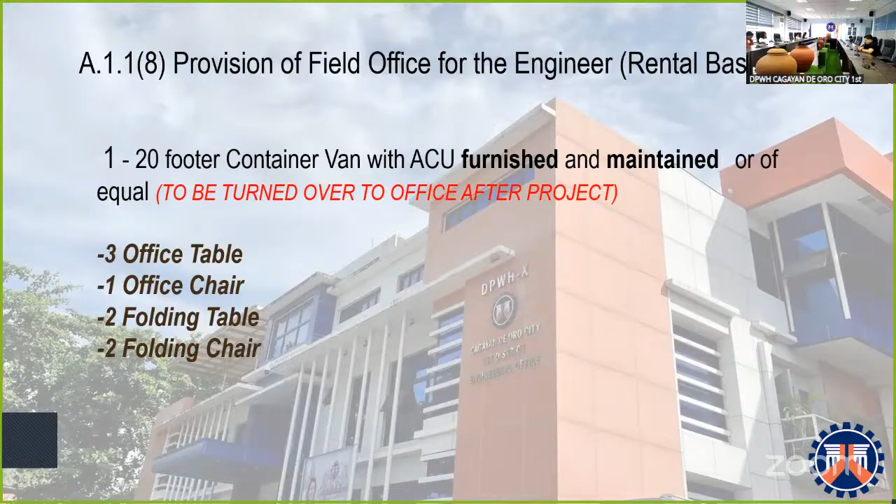For the B.15 detour/access road, it is to access the project location, which is a very steep area. For the equipment use, there will be a crawler crane, vibro hammer, backhoe, motorized grader, and also the vibratory roller. The materials used are based on the slope that I computed.

There's a common borrow of 250 cubic meters along the 20-meter axis going down, and also the steel sheet pile U-type of 6,600 kilograms for stability, so that the embankment does not roll down and affect the access road.

And item 611, seedling, saplings, and other program initiatives. Here, one quantity or each is equal to 100 saplings.

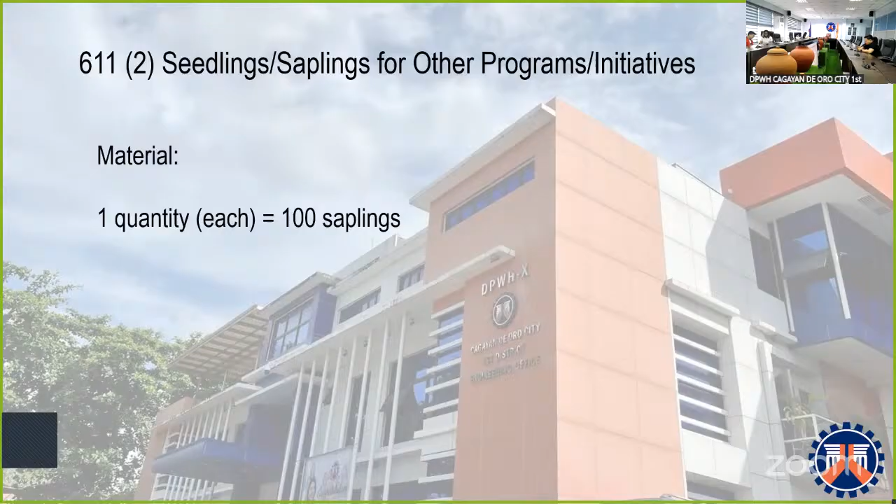Thank you, that's all for this project. For the project 26-052. Thank you, Engineer Alvin.

So is there any questions or clarifications regarding the details of the project? There's none. How about our online viewers? So there's no more questions. With that, let's conclude the discussions on the details of the projects.

At this point, may I call Engineer Sherla for the instructions and guidance for our prospective bidders.

Good afternoon, Mr. Vice Chair. Good afternoon, everyone. I will be discussing the procurement requirements and procedures for these infrastructure projects. So here we have the civil works projects with their corresponding contract IDs and the approved budget for the contract.

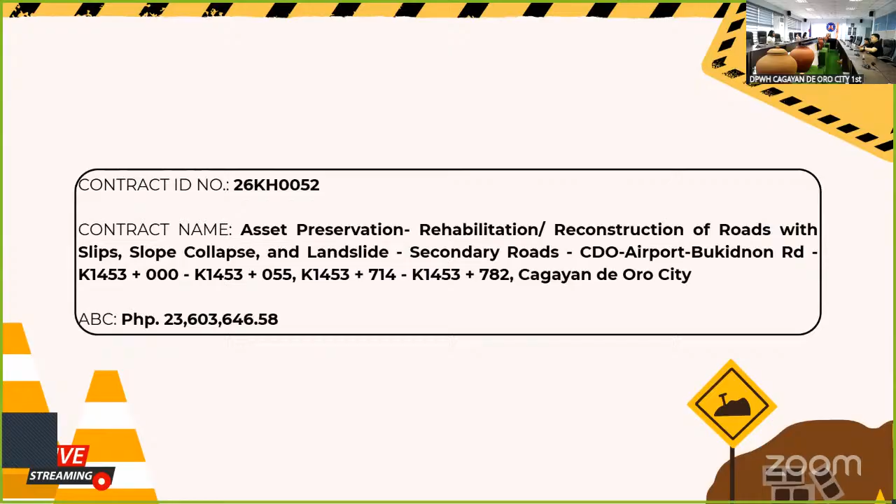For the agenda, we will discuss the project details and the basic contract data, a brief orientation on the minimum requirements that must be complied with by the bidders, and the common reasons for non-compliant bidders.

For the procurement schedule, the buying of tender documents is until May 19, 2026 at 9:30 AM only. The deadline for submission of bids will be on May 19, 2026 until 10 AM, and the opening of bids will follow right after the deadline.

For the submission of bids, it may be done manually or electronically. However, bidders should only select one mode of submission, either manual or electronic. For manual submission, we have the two envelope system. The first envelope contains the technical documents and the second envelope contains the financial documents of the bidders. These are separated and in sealed bid envelopes with one original and two copies.

For the electronic submission, the details are stated in the bid data sheet in accordance with Department Order 87, series of 2020.

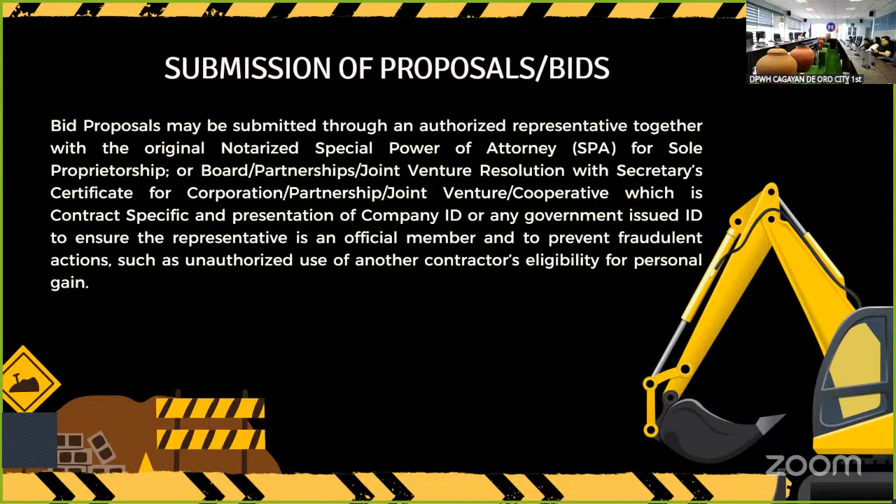Bid proposals may be submitted through an authorized representative, together with the original notarized special power of attorney for sole proprietorship, or board or partnership joint venture resolution with secretary's certificate for corporations, partnerships, joint ventures, and cooperatives, which is contract specific, along with presentation of a company ID or any government-issued ID to ensure the representative is an official member and to prevent fraudulent actions such as unauthorized use of another contractor's eligibility for personal gain.

For the first envelope, the bidder must provide a valid and updated PhilGEPS registration certificate in all pages. Failure of the bidder to update the PhilGEPS certificate of registration shall result in automatic suspension of the bidder's certificate.

Next, the bidder must provide a statement of all its ongoing government and private contracts, including contracts awarded but not yet started. Failure to disclose the required information, or providing incomplete or false details, may result in disqualification from the bidding process.

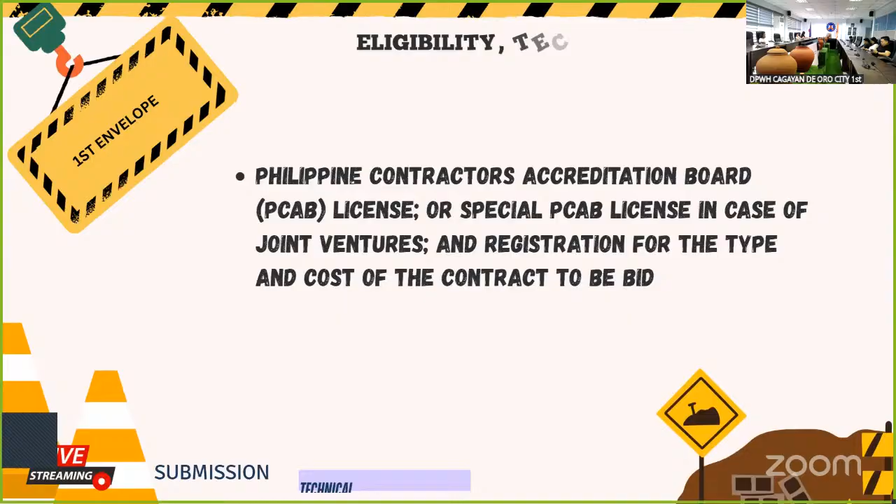The bidder must also provide the single largest completed contract, or SLCC, and a PCAB license or special PCAB license for joint ventures.

For the bid security, the bidder will only choose one form to be submitted. We have four forms of bid security: cash or cashier's check, bank guarantee, surety bond, and the bid security declaration. Here we have the standard form for the bid security declaration.

Next, the bidder must provide an organizational chart for the contract, the list of contractor's key personnel, and the list of contractor's major equipment units. Please see the attached bidding documents for the required number of years for the contract, key personnel, and the number of units and capacity for the major equipment.

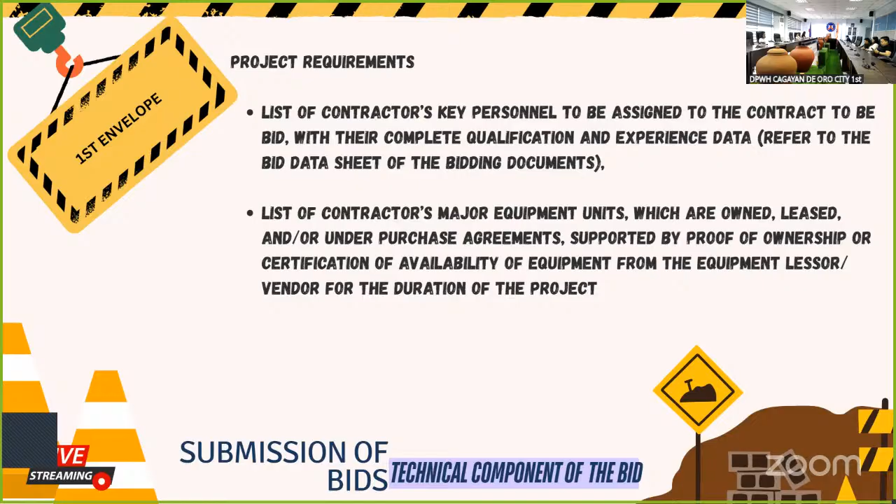Here we have the standard form for the key personnel and the standard form for the list of contractor's major equipment.

The bidder must also provide an original and duly signed omnibus sworn statement, the net financial contracting capacity or NFCC, and a joint venture agreement in case of a joint venture. Here we have the standard form for the omnibus sworn statement.

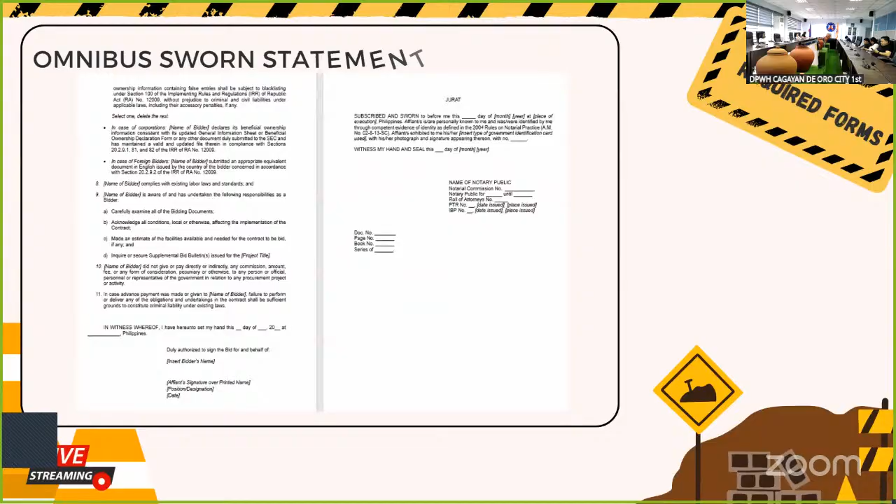For the second envelope, the bidder must provide an original and duly signed financial bid form, the bill of quantities, the detailed estimates, and the cash flow by quarter. Here we have the standard forms for the bid form, bill of quantities, detailed estimates, and cash flow by quarter.

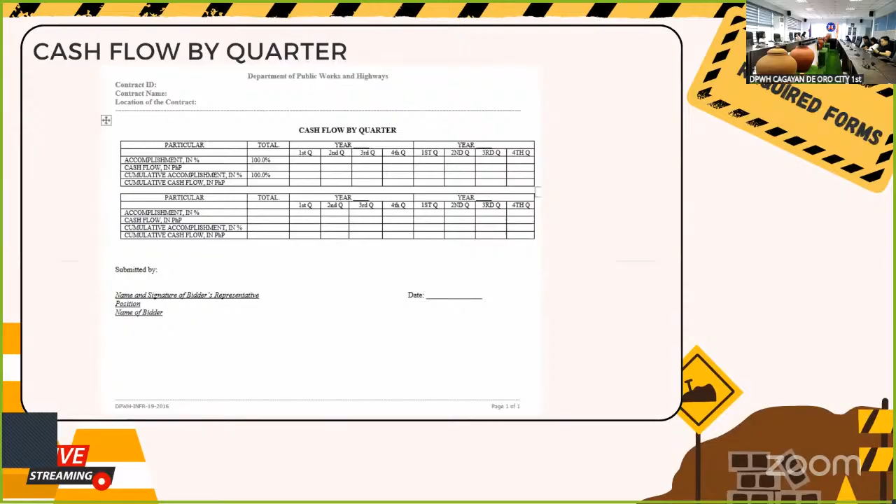Here are the common grounds for non-compliant bidders, based on observations from previous procurement activities: missing or incomplete required documents, unsigned or improperly signed forms, incorrect or inconsistent computations in the bill of quantities or financial proposal, expired or invalid licenses and permits, non-compliance with specified technical requirements, and failure to use prescribed forms.

To avoid that, we have preventive measures and recommendations: carefully check the validity of all documents, ensure all forms are signed by the authorized signatory, use the exact forms provided in the bidding documents, verify computations before submission, organize documents according to the prescribed sequence, and ask clarifications from the BAC secretariat within the allowable period.

For other matters, we have Department Order number 110, series of 2024. This is the implementation of ISO 9001:2015 certification requirements for Large A, Medium B, and Medium A contractors in the procurement of infrastructure projects of the department.